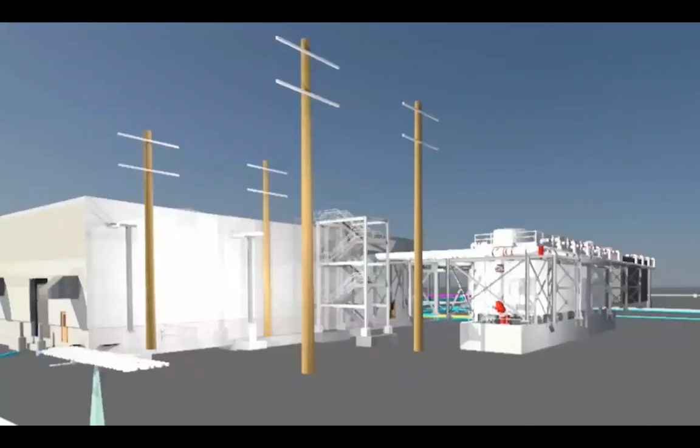Benjamin, when we spoke to you last year for By Design, you had said that BIM is not an if, it's a when. Do you still hold that to be true, and do you think this might accelerate that movement? It has accelerated it. There's lots of trade contractors and individuals that weren't really considering it before—oh, we're never going to need to do this—and now it's coming to light very quickly and easily. I've heard a lot of people keep referencing the 2008 changes that took place, and that was kind of an unknown crash, and it was unexpected.

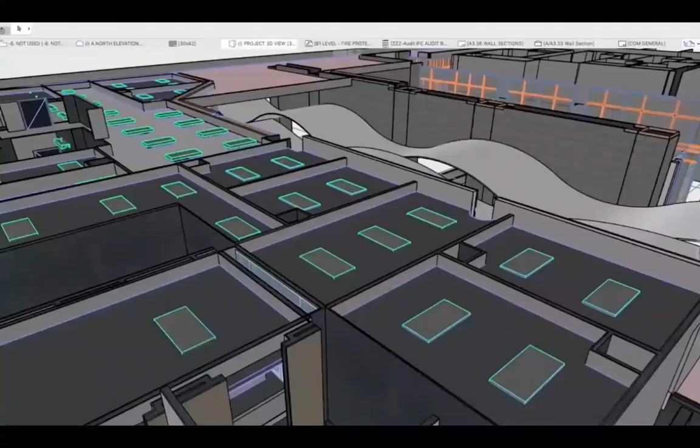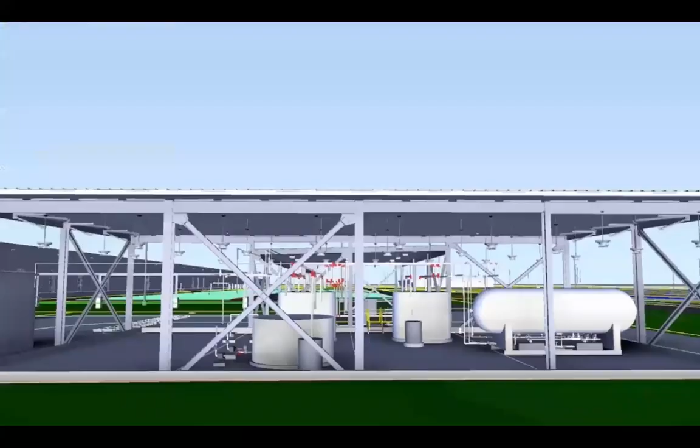This was also unexpected, but the firms that were doing virtual design and construction and BIM coming into that emerged a lot stronger out of 2008. Coming into 2012 and 13, they really hit the ground running and emerged fast. I think we're going to see the same thing here. Those that had good work practices, were already virtual, like Aaron's firm, and able to keep working from home, as this comes back, they'll be well situated to advance quickly.

And Aaron, from your standpoint, virtual technologies, augmented reality, other ways to work remotely with clients, engineers, contractors provide immersion. Do you think there's a chance those technologies might advance a little more quickly, or adoption might increase?

We're just kind of starting to get into that now, I think, because for the first 4-6 weeks you're sort of like, well, we'll just put that off another 2 weeks, and do it when this is back to normal. But clearly that's not going to happen anytime soon now.

So now we're really figuring out how do we run a community design charrette virtually, how do we have a big design meeting with a group of stakeholders and get everyone's input and make sure everyone feels heard remotely. We're figuring that stuff out, and I think everyone's figuring that out and moving forward on it.

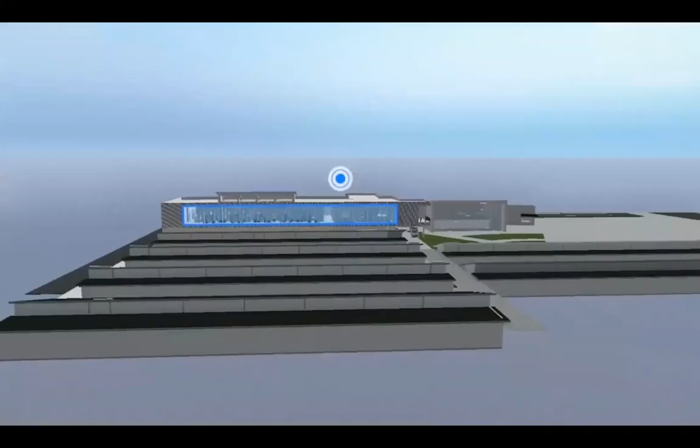And I think some of the things we've done in the past with using BIM and virtual design and construction, really having those three-dimensional capabilities, are a good groundwork for that, and being able to show people the designs in a different way is helpful. This is going to be a big disruption, and that's also an opportunity for change.

So that was a good introduction to this, and I think moving forward, exactly what Aaron says, it's a disruption that creates opportunity for change and to rethink our business. Certainly their discussion in terms of the 2008 crash, how that affected the market, and how people implemented new technology to become more productive really helped propel us out of that crash back then. And certainly similar things are happening now.

So let's talk a little bit about the current trends in the business of architecture. In doing that, I want to focus on a particular article that came out recently from Phil Bernstein. Phil, if you're not familiar, is a very well-known figure not only in the architecture industry, but in particular in the technology industry and BIM.

Some of the things he talked about in this article were a couple points. First, economics. He talked about the fact that we're going to see increased competition for projects and pressures on fee for design services, very similar to what happened back in 2008.

Practice methods: we're going to create new value through digital services. I think it's a real opportunity right now to do that, and I'll talk about some of that in this presentation. It's going to create a new practice structure in terms of growth of remote work and collaboration. That's certainly something we're already seeing as a result of the COVID crisis, and we're going to see even more of that, which I'll also review in a few minutes.

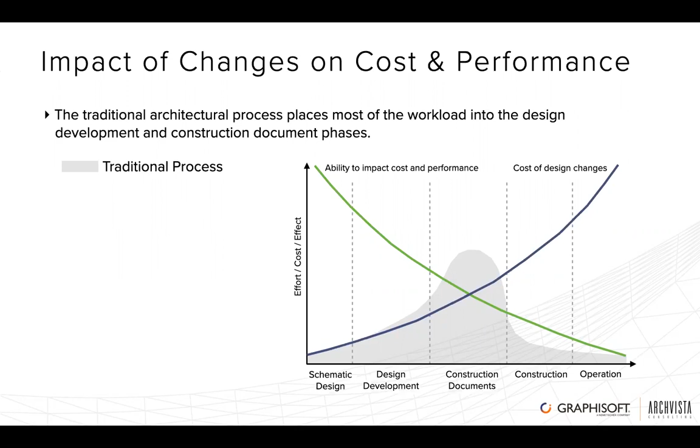For many of you, you're probably familiar with this graph. It's a pretty typical architectural process. I'm an architect by training as well, and this is a typical workflow, right? A lot of our work, smaller parts, goes into schematic design development, the brunt of the work goes into construction documents, and then ramps down from there into construction operations. Of course, any changes to design can affect costs as we move across the process of the project.

Now, what's happened with BIM, according to the MacLeamy curve, which came out about 2004, is really the idea that if you start BIM in schematic design, you can really start to move that bell curve forward in the process, which, by having that integrated process, allows you to reduce some of the impact of decisions on the cost of changes of the project.

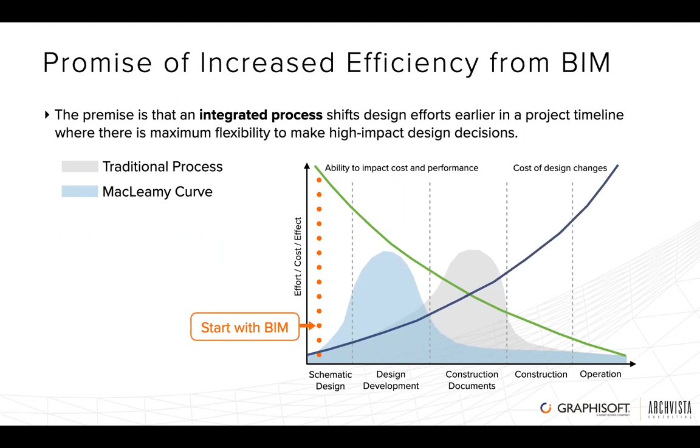The reality of what we see in implementation is that a lot of firms really don't start until the latter part of design, well into design development. In fact, one firm I know has two teams running in parallel, starting both at the beginning of the project, one in SketchUp, the other in Revit. The Revit team always follows the SketchUp team, building the Revit model at the end of design development, then going forward with that model.

That's really not a great workflow. But even if you're not doing that, a lot of firms are starting much later in the design process with BIM. And that does lead to firms not seeing that promised productivity increase, which is really what we're going to talk about.

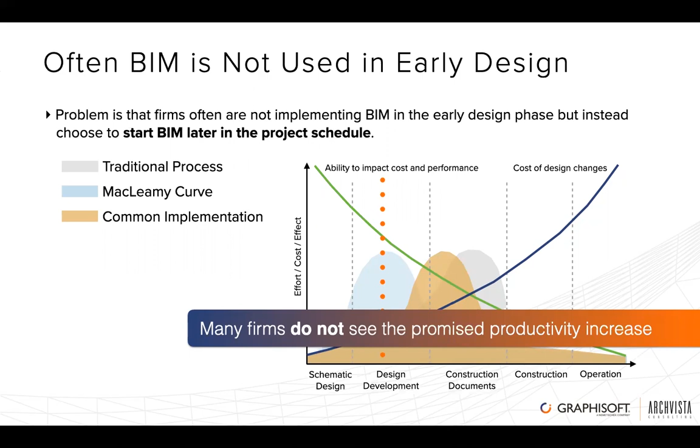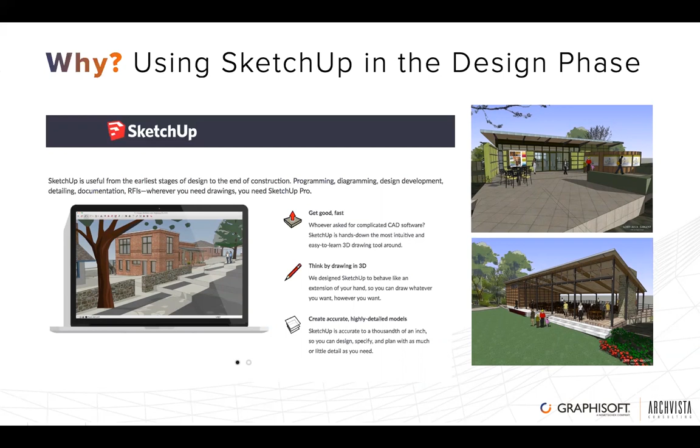As I mentioned, SketchUp is a great tool, and a lot of firms are using this in their design process, and many of you may as well. I use it a lot in my own work, and it's a great tool. The only problem is it's not a tool that you can really move into the BIM process.

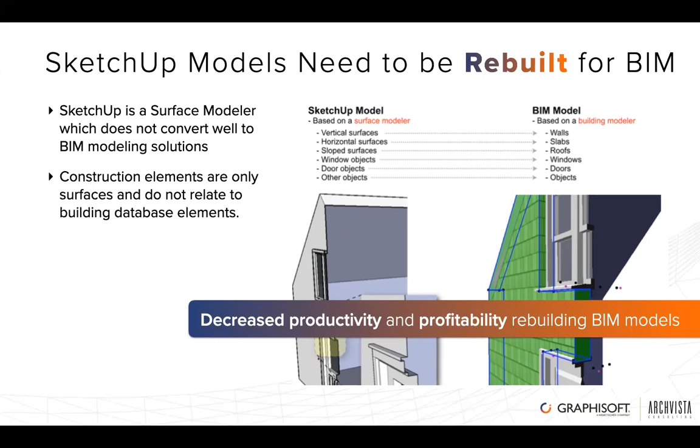That information needs to be rebuilt, and as a result, it's obviously going to decrease a lot of your profitability and productivity. It's simply the fact that your SketchUp model is built around surface modeling technology, while your BIM model is focused on BIM modeling, and they don't work together. So you really have to use one platform or the other, or just know you're going to have to rebuild it.

So what if we could actually have that same SketchUp workflow in the BIM modeling tool you use? Here in ArchiCAD, you're able to take that model, very similar to SketchUp, using what we call a morph tool, using a similar follow-me type command. You can basically start to work with this BIM tool within that process.

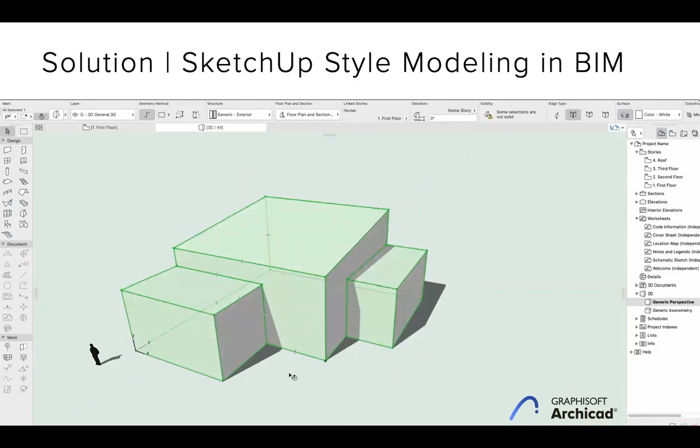This really allows you to adapt a similar workflow within the BIM tool, rather than having to build something outside the BIM tool, throw that away, and rebuild the model. So here it allows us to use this within the BIM tool itself.

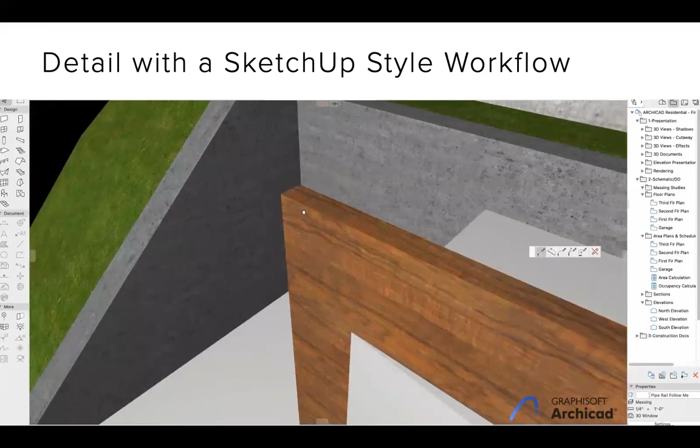And then, of course, not only the push-pull process but also the follow-me command. Here we have the follow-me command in ArchiCAD, actually called the tube, but a similar concept. You basically create some sort of outline in 2D, take that outline, and extrude it along a path, which creates a detail within your model.

That detail workflow can be used not only in the design process, as we're doing here, but could really be used in any part of your documentation and detailing process within your project. So this really allows you to use that same SketchUp style workflow even further into your project process.

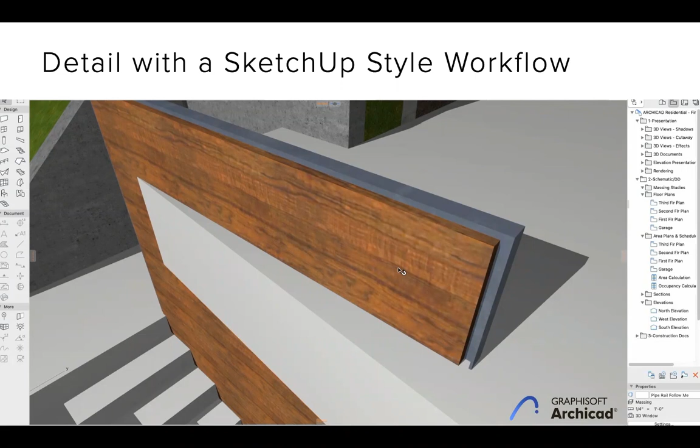It's really important because you don't want to throw too many dialogues or too many things into your process. You really want that early design methodology where it's about moving dialogues and elements outside of your workflow, allowing you to free-flow think as part of your design process.

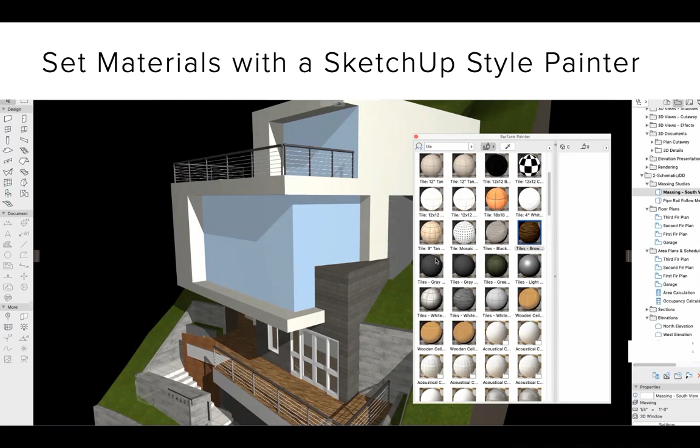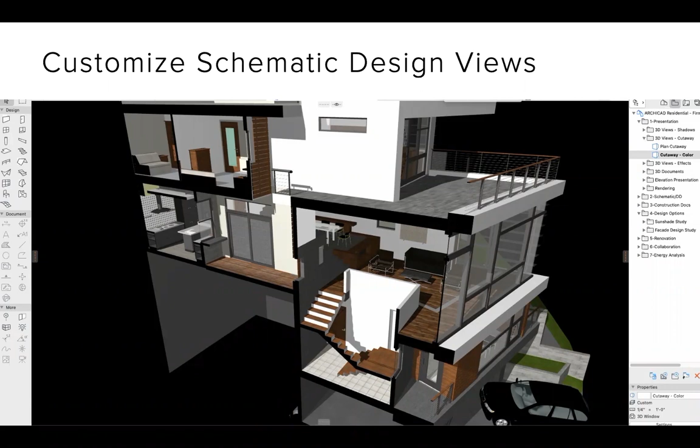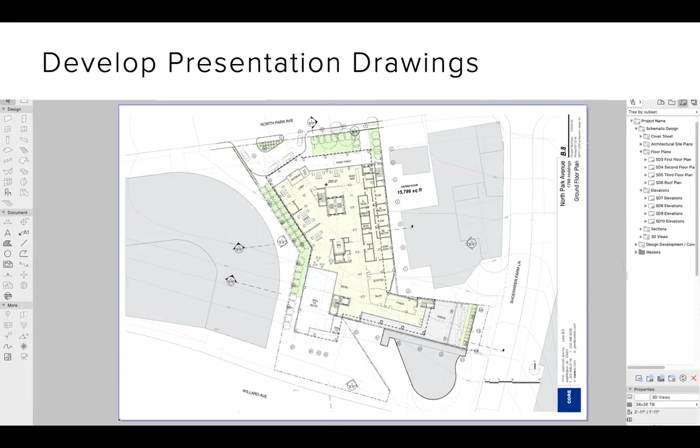And of course, being able to develop presentation drawings. Great example of a project here—I'll show you a series of these—where they're developing a tower with various types of floors and information that needs to be designed. But we're at the schematic, early design level. We want to do something very simply, quickly developing presentation drawings to create illustrations, similar to what you might do in SketchUp, adding different elements to show and illustrate circulation and movement as part of that design process.

And then, of course, to have schematic layouts that are automatically updated. So as your 3D model is being developed, these views, which are placed onto your layout and title block, are automatically updated with any changes occurring within your schematic design.

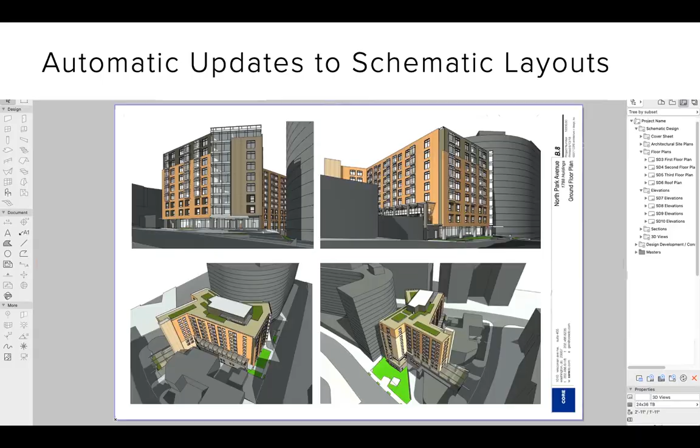Now, one of the real new movements right now, beyond the schematic or early design level, is real-time rendering. The Unreal Engine, developed by Epic, has become the most popular rendering engine on the market. Real-time rendering uses your video card, which allows the rendering to happen much more quickly and with much higher quality. I'm going to let you see a little bit of what the Unreal Engine can do in terms of rendering.

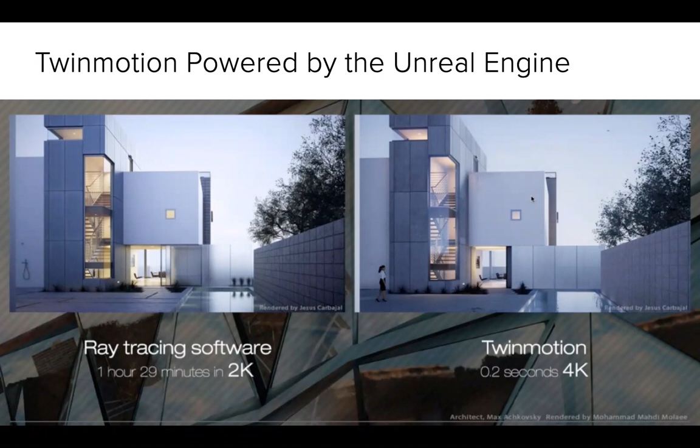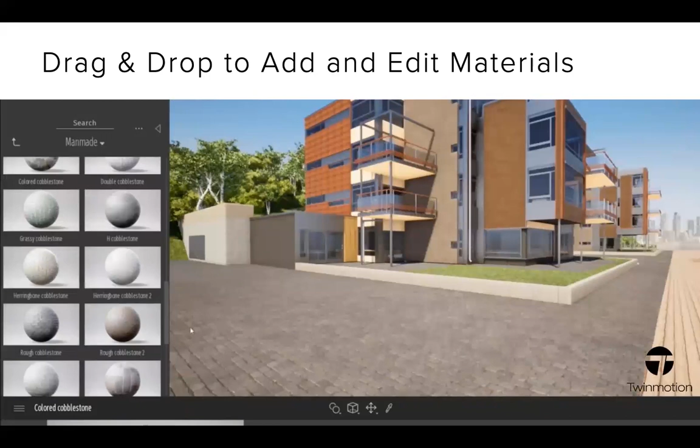Part of that too is not just rendering, but being interactive within the model—changing colors on the fly and seeing real-time materials, not just flat textured materials. This is a big difference. If we're looking at paving, or material on a wall, whatever it might be, being able to quickly go through a library and paint, as you will, in a more realistic view is a huge difference.

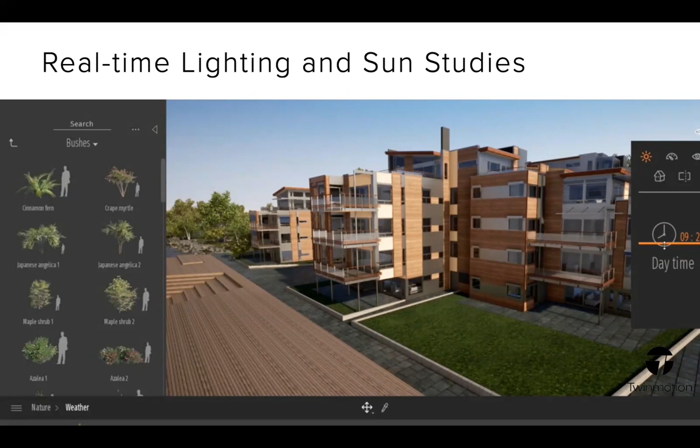Same thing for lighting and sun settings—the ability to go and change lighting and see that in real time, to change the sun and see that in real time. I cannot tell you how many times we've done renderings using processors and not been able to get the right light, having to re-render. It takes a lot of time and effort. But being able to do this on the fly in real time saves you a huge amount of workflow.

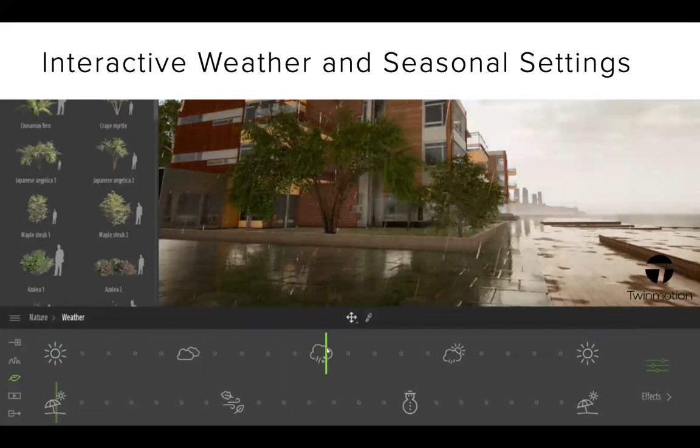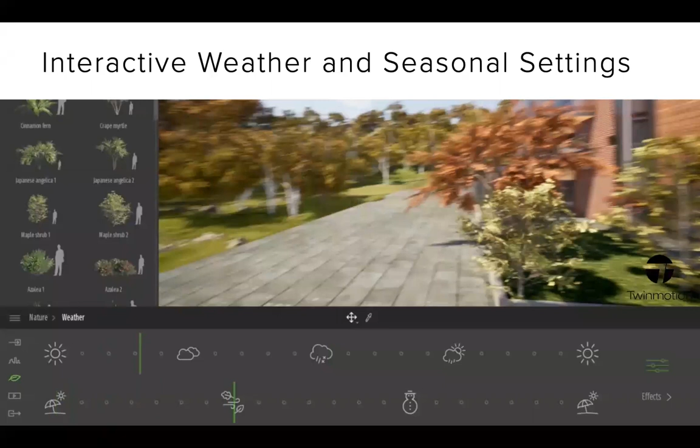And then interactive weather and seasonal settings. Being able to show a rainy day if you're doing a project in Portland or Seattle, as some of our clients are, and seeing that change on the fly is huge. Or if you're working in the mountains, you may want to change the foliage to show fall, or show snow on the ground. Being able to toggle this quickly and see that change in your model and the landscape around it is enormously helpful in speeding up your process.

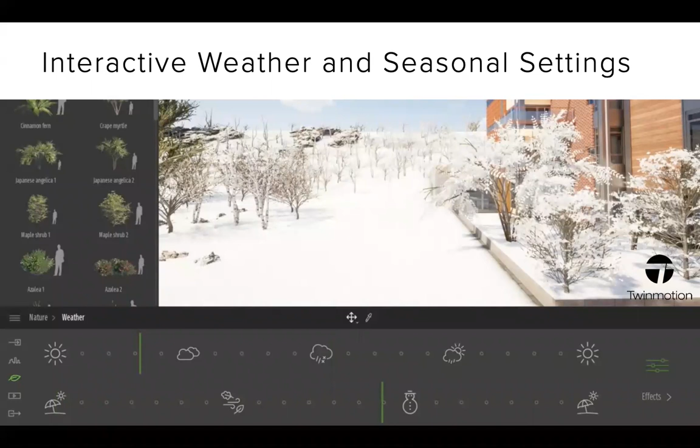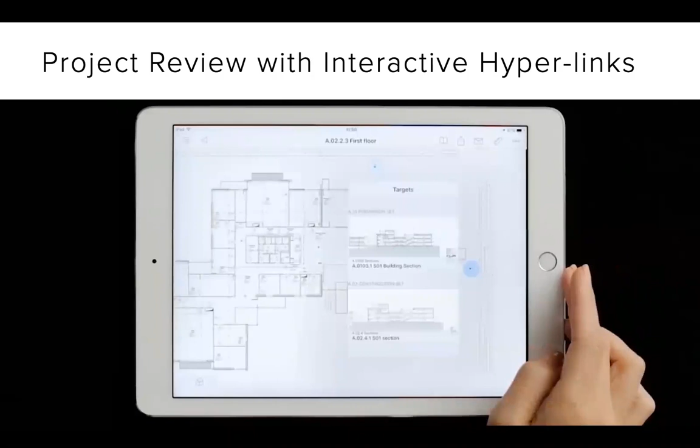Now, one of the things that's also become very popular for many of our clients is BIMx. BIMx is an app that works both on mobile devices, as you're seeing here, as well as on desktops and the internet. What's really exciting is that it uses hyperlinks—what you're seeing are hyperlinks that pull up drawing views.

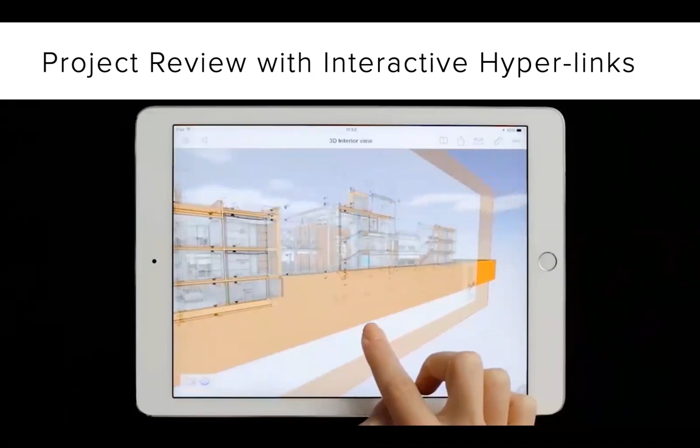When it pulls up those drawing views, we're able to interactively work with them, including clicking on a drawing and actively moving through the section, or through a floor plan cutaway. This allows you and your client to more interactively work with drawings and visualize them in relationship to the model.

And that's hugely important. We've had a number of clients tell us that this has really enabled their clients to understand plans much better and 2D drawings much better. Because when you show clients 2D plans, oftentimes they don't quite understand them, but when it's in relationship to the model, it becomes very clear.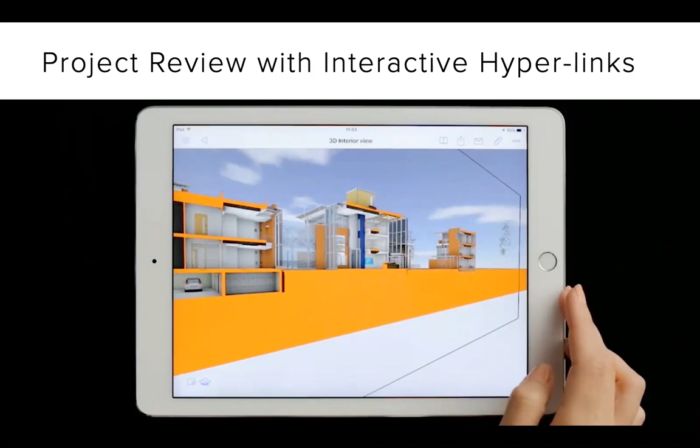And also being able to put this into a presenter mode. This is very similar to a PowerPoint or Keynote type presentation, but it's inside BIMx. It allows us to create saved views and then have animation between those views. So if you've used SketchUp and created saved views and moved between them, you'll know it animates between those views and creates a really nice presentation workflow.

So I'm going to let you hear from Lauren and Blair. They're both principals in a young firm that started off at the start of the year. And they, of course, starting a new practice, had to adapt to the impact of COVID on the business. They're going to talk about that and also about adapting a new technology as part of their process.

We've worked with BIM software before, knew the value of it, and have spent the last several years in a smaller firm using 2D again. Being able to go one way and then come back really highlighted a lot of the challenges and limitations that 2D has. We would push our SketchUp models and use them in documentation as far as possible, because just living and designing in 3D was where we all felt comfortable and natural. Now that we were in charge, we got to do it - we were eager to switch back to a BIM program.

Given the fact that you had previous experience in Revit, why not just take the safe bet and stick with what you know? Why ArchiCAD over the software that you knew? Lauren and I both, for better or worse, really like to challenge ourselves and find not just the common solution to things, but what we think is the best solution.

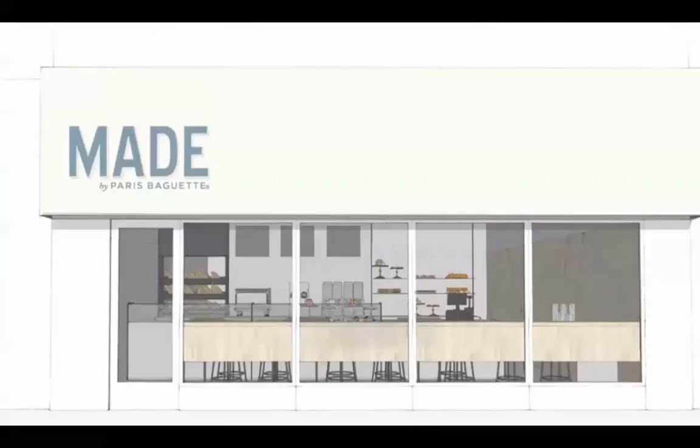I know Revit is much more popular, but we looked at this program and just liked it better, particularly for front-end design and visualization, which to us is really important in terms of being able to make that happen more quickly and using fewer programs to be more efficient. If we can manage to do everything in one software, your team is much more flexible and can move a lot faster.

Being able to streamline the process, and also think about the story that your documents tell for all parties involved in making the project real. Yeah, we want to be effective and try to be on the forefront of where things are headed next.

Great. So we'll go ahead and you can see some of their feedback and why they decided to move to a single solution versus using several different pieces of software, as we talked about before, trying to make that design process more efficient.

So now let's talk about cloud collaboration and how that is being used in the workflow between offices and remote working now.

One of our clients, Joseph Vance, recently commented in an interview that teamwork is great because you don't have to be in the same room, same building, same continent. It's very robust software for working together. Teamwork is powered by BIM Cloud, a solution that can be either on your local server or, as more of our clients are using, as a service they can tap into to create a very remote team.

And of course, this is also very powerful for mobile devices and presentations, because you can now access your BIM model on mobile devices, and any red lines, any updates, etc., happen automatically, creating that nice interactivity with your BIM model on BIM Cloud.

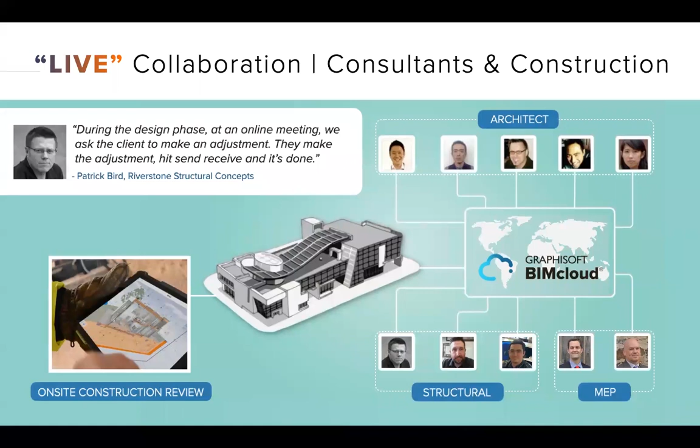The other thing just announced in the most recent release of ArchiCAD is the ability to subscribe to changes. This is really important, because whether you're working in your own team or with consultants, you want to see when changes occur, particularly to certain elements.

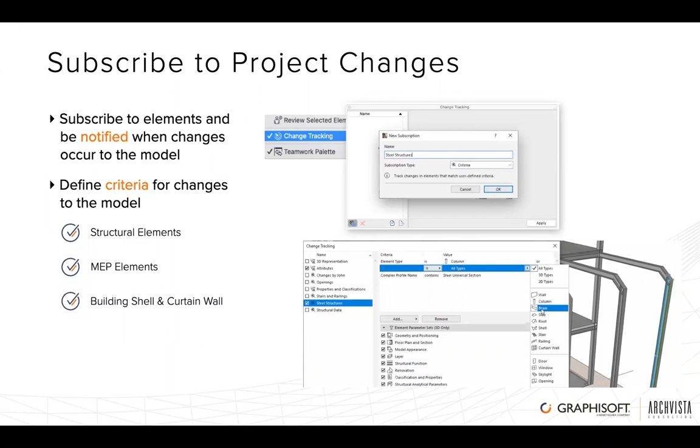If you have structural elements and those are changing, you need to know that. If you have MEP components changing, you need to know about that too. Or if you have particular systems like a building shell or curtain wall that's important to the edge of the building, if that's being changed, you want to be updated. With the subscription process, it will alert you to any changes that occur and also allow you to track those changes.

Using model review and model compare, we can now bring together different versions of models, either from your office or from a consultant, and be able to compare what's been modified, what's new, and what's been deleted, and then track those with the issue organizer.

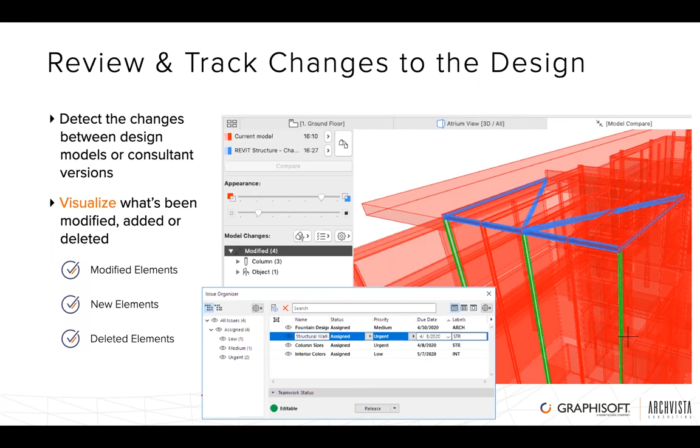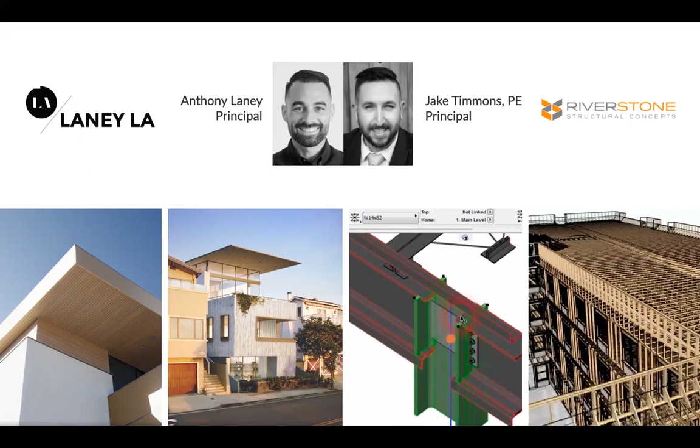This is Anthony Laney, principal of Laney LA, and Jake Timmons, principal of Riverstone Structural Concepts. They're going to talk about a recent presentation they did showing how live collaboration can work in a cloud-based process between an architect and a structural engineer. Riverstone is based in Idaho, and Anthony's company is based in Los Angeles. I'll let them talk through this process.

Wanted to adjust the overhang of this roof. Here live in ArchiCAD on our side, we're going to pull back that roof slab, and of course that is going to automatically expose the structure.

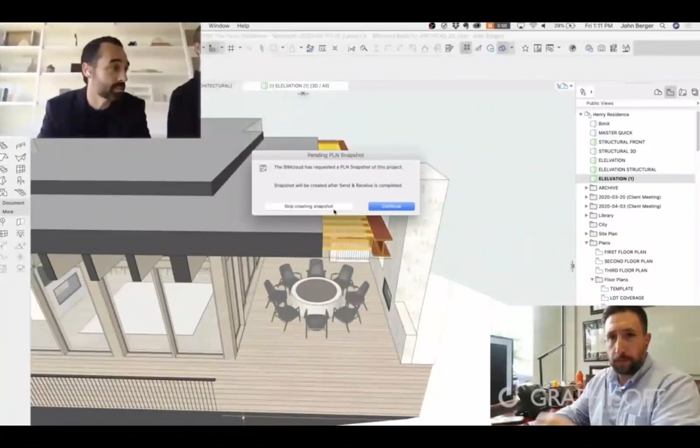And then how's it going over there, Jake? Can you see us? So Jake, we just sent you the update. Perfect, you'll see our live model just got updated, and you'll see you've got a few revisions to make to a few of those beams.

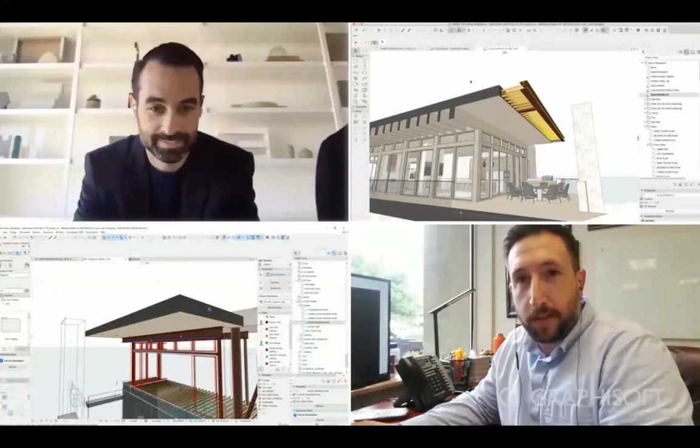Fantastic. Definitely not the first time with Anthony's office that they change something in the middle of the design - we're used to this. There we go. So now I've received changes.

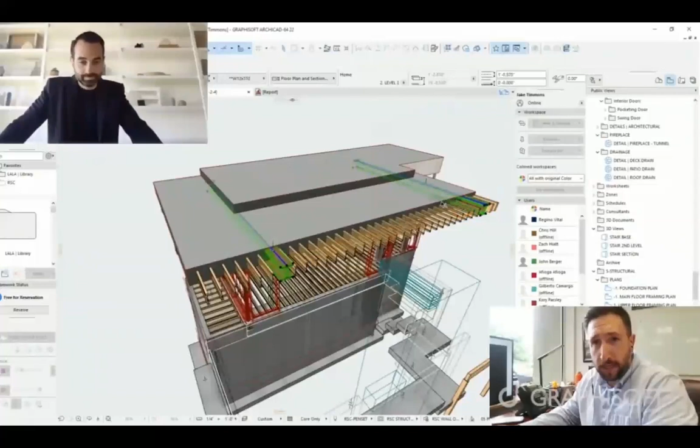There we can see the live update has occurred. I can assess the scope of the changes, and then I can start making my revisions. He informed me that's a 4-foot shift, so I can just start splitting this and revising it to the new dimensions.

We're just about there, a couple more beams.

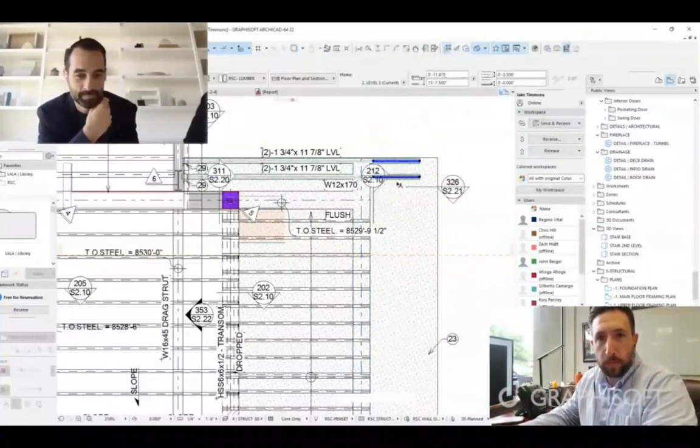I can review that, coordinate on my end that everything is happy structurally. I can see the revisions there, check that everything's trimmed nicely, and I'll send those changes back to Anthony's team.

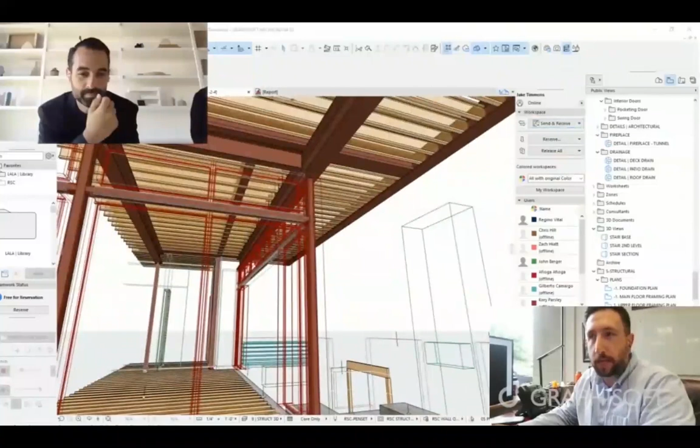Cool, click the right button. Thanks, Jake. So here with Johnny, we're going to receive those changes on our end. Great, so it came through on our end, and I'm sure we will be bothering you with some more revisions in no time. So I think you can kind of see the process there.

What's really powerful is the fact that they're both working remotely, and being able to see these changes happen in real time is extremely important. One of the things we get as feedback from our clients is that when they're working with structural or mechanical engineers making changes to drawings, 2D or 3D, they then have to kind of relate what those changes are. It's difficult to track, and it's easy to miss something. Being able to have these live conversations in real time, in a real workflow, really does make a difference.

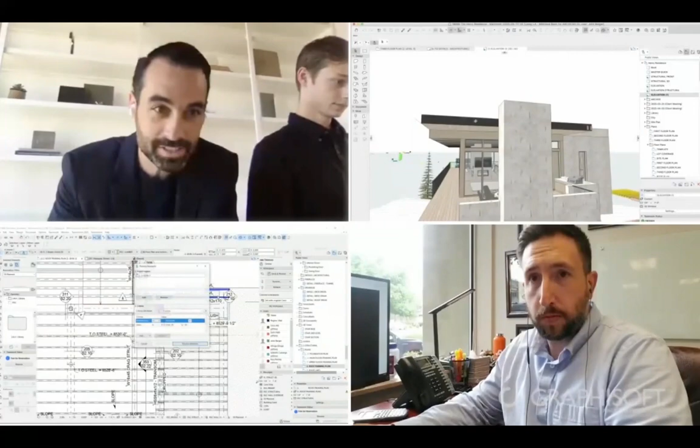So let's talk about how we can take these different components we've discussed and compete by challenging core assumptions. I'm going to go back to that original article from Phil Bernstein done in Arch Daily, and focus on 4 particular parts: economics, practice methods, practice structure, and technology - looking at those components in terms of how to strategize your business to become more efficient, more productive, and ready for this next era of the market.

So let's talk about economics. There's another great article in Architect magazine that asked: can technology solve architects' productivity challenge, making a design process more efficient? There was a quote in this that I thought was really interesting - you should read the entire article, it's a great article. But it basically said business conditions have been so good for so many years that we've not noticed that many design professionals are still stymied by the same old business practices.

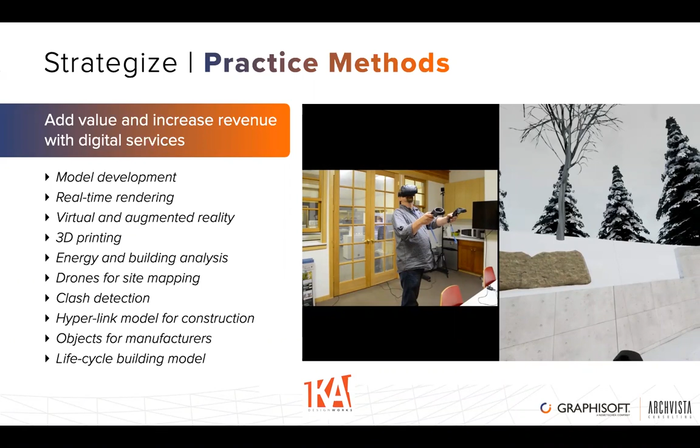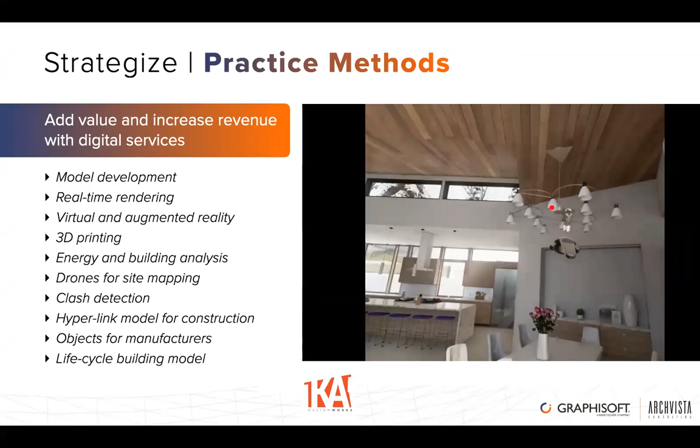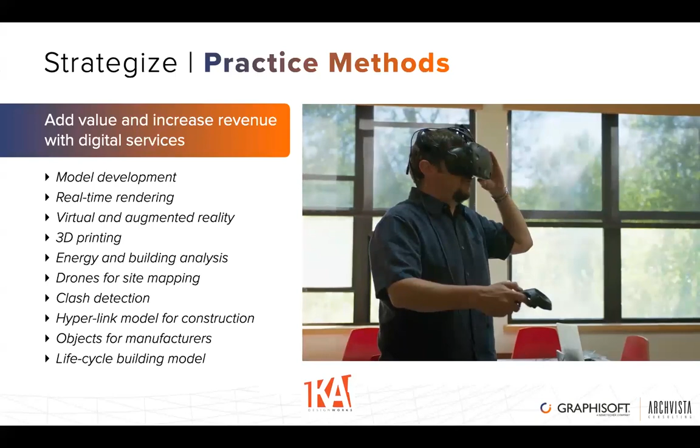Objects for manufacturers, lifecycle building model. What you see to the right here actually is one of our clients, this is KA DesignWorkz, and they use virtual reality as a means to help clients better understand the space. In fact, they even hired a gaming developer subcontractor to help them put interactivity into these VRs so they can actually change materials on the fly as their clients were going through that.

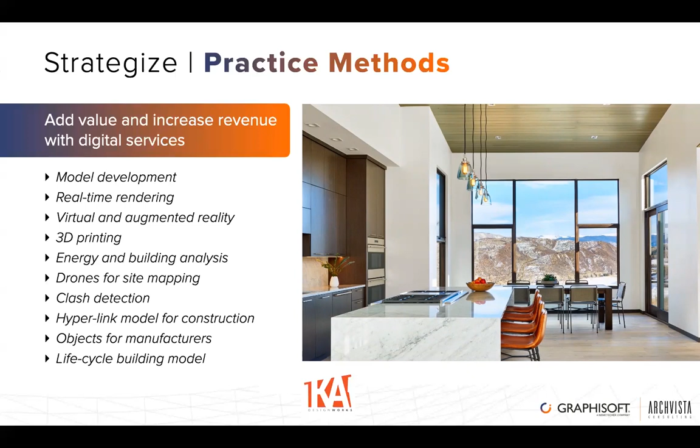So again, it's that value add and those increased revenue opportunities that you have by moving into a more sophisticated workflow.

Practice structure. So what is a practice structure? That's changing the way that you do your business. As Phil Bernstein pointed out, there's a big change right now in terms of remote collaboration and more sophisticated collaboration workflows. Cloud collaboration is important, so firms that are digitally facile are using new innovative methods and challenging industry standards.

In fact, many of them are even looking at and saying, do I need to use the industry standard BIM system? Maybe not. Maybe I can use another system, which is open standards, works with Revit, like ArchiCAD, because it's better for my design workflow and is specifically designed for architects.

As an example, this is Brook Street Lofts, a project done by Kitchen and Associates. It's a 17 million dollar residential complex, and at the beginning of COVID, all of a sudden they realized they needed to rethink their process in terms of how they were going to work together, just needing to streamline some processes.

They also realized that with new cloud collaboration technology, they could actually bring the architect, the structural, and the MEP all together into a truly collaborative workflow. As Keith Peacock said, they bucked the system. It took a lot of work to bring all the various entities together into this one model, but the result was really being able to identify conflicts and issues before you get to the field.

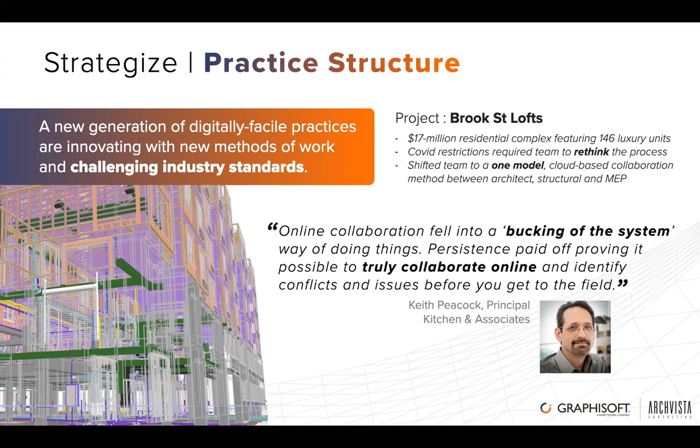And to strategize technology, this is extremely important. There's a lot of things we can talk about in terms of that, but a big part of implementing new technology is change, and it's really trying to focus on what that means as a change to your business.

I'm going to let you hear from Megan and Dwayne in a second. Megan Beckman is a project manager, and Dwayne Tran is a partner at KA Design. They're located in Los Angeles, and they're going to talk about their process of technology change in the business and how they implemented BIM and ArchiCAD as a real cultural evolution within their workflow.

Change isn't a unique idea for us. It's a matter of evolution, a necessity, something that's continued to help propel us and keep us on the front end of a 30-year niche market. All our work is custom, it's for the site, it's for the client, and that allows us to approach each project with a different design, and also how we engage the technologies that we have.

Ultimately for this company, we realized that we wanted to move towards a three-dimensional platform. We needed to in order to continue to be on the leading edge of where the design market was going. So moving towards ArchiCAD and BIM was a natural evolution of that.

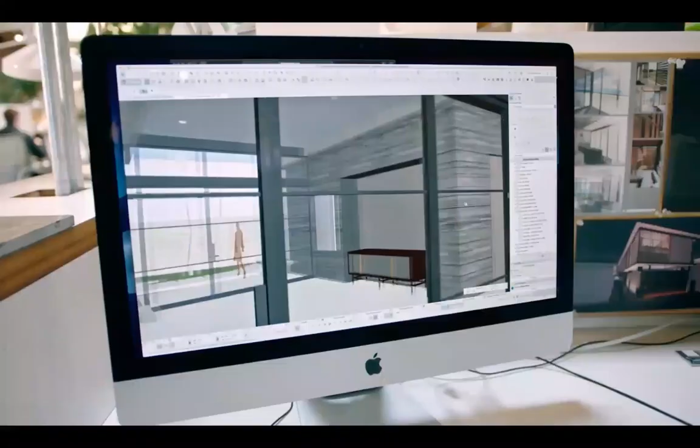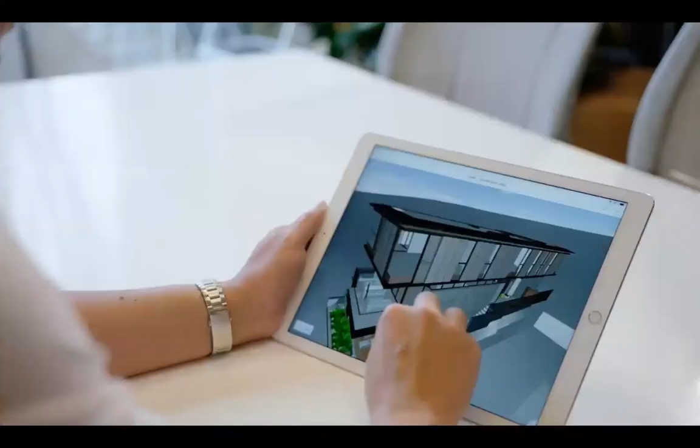I would say that the implementation relied heavily on knowledge transfer in-house and development of in-house resources. It developed an approach that was fully KA, not someone else's ideas brought in. It's a really powerful thing, quite honestly, to be able to develop a cultural collaboration that's truly about greater awareness and accountability. ArchiCAD allowed that to happen.

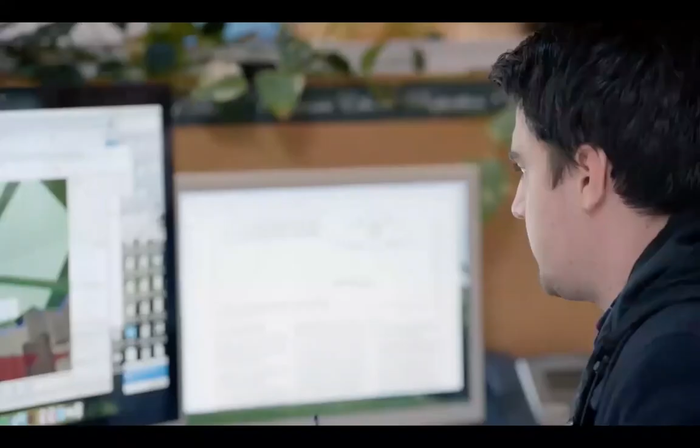We're all co-owners of the project. Yes, much more so than ever before. We're all in the model together, and it forces a different type of communication between all of the team members. Everyone is in the loop, in the know.

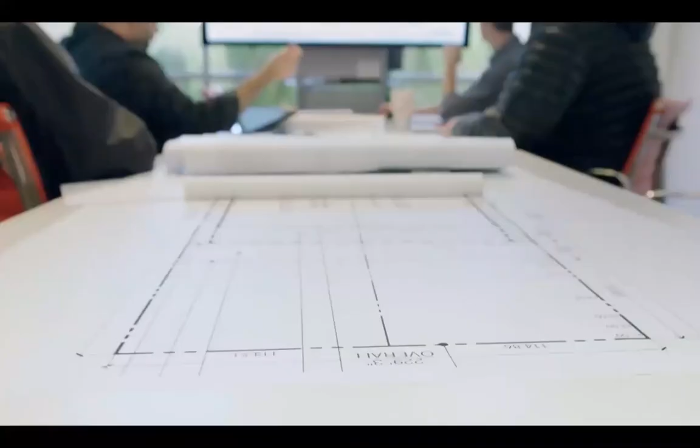I think that's one of the really powerful things about the program, is that it's so conversant in allowing so many different people from different backgrounds, different experience levels and expertise and skill sets to be able to still share within the model. Even internally with senior people, it allows them to be very adept at being involved in the design process with younger staff or with model managers who are much more knee-deep into the management and ownership of that model.

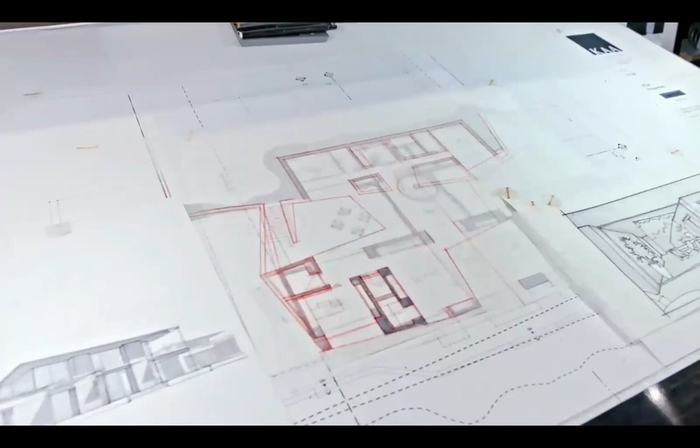Our collaborative nature really extends to our external teams as well as internal teams. We have big coordination meetings with structural engineers and mechanical engineers, and whether they're hand drawing, they're in Revit, they're in AutoCAD, whatever their platform is, we sort of bring them into our platform. So it's completely changed how we design together.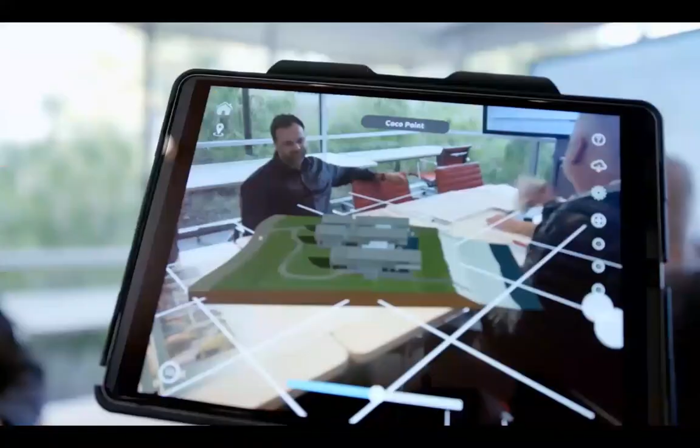It's a bigger conversation than ArchiCAD at this point in time. It's about all the things that we can do beyond ArchiCAD that ArchiCAD has now opened the door for. And the notion of continual change, continual adjustment, that is what keeps the whole team together.

Yeah, great. So yes, if you want to learn more about KA Design or about other firms, By Design is a great opportunity to do that. This was actually part of the season 3 Metamorphoses. They've had 4 seasons now, and you've seen a couple of the clips as part of this presentation today.